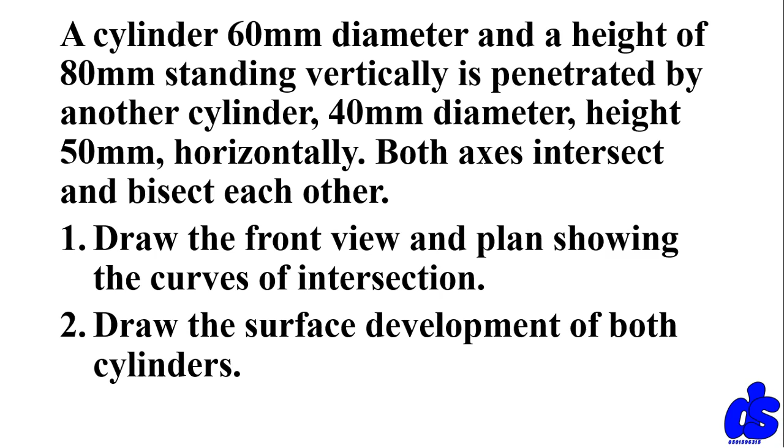We have been given a standing cylinder being penetrated by another cylinder. The standing cylinder has a diameter of 60 mm and a height of 80 mm, and the cylinder that's penetrating it has a diameter of 40 mm and a height of 50 mm. So let's quickly draw the front elevation and the plan, then we develop it when we are done.

I'm going to begin by first drawing a center line through. Bring it here. That's my center line. Then I'm going to draw the first circle. I'll start with the plan and I'll move on to the front elevation. Let me extend this.

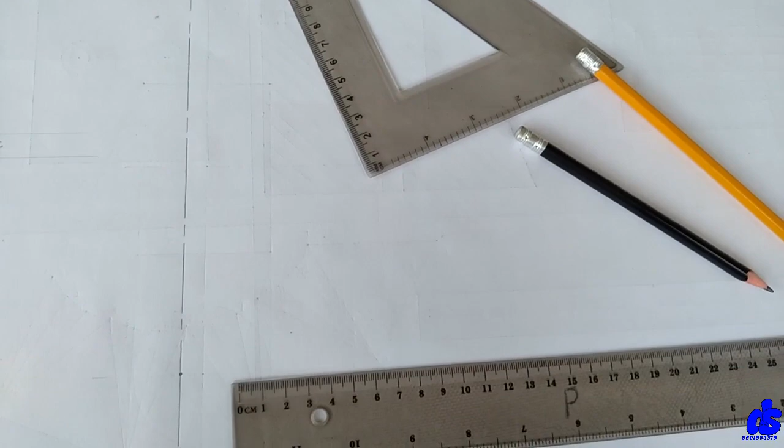So I'm going to mark here as well. I'll be drawing a circle. I'm going to measure the diameter of the first one. Sorry, the radius, 60, so I'll pick a distance of 30. Right, so that's 30. Let me stand here and draw a circle. Yeah, that's better.

Next, I'm going to project this circle to the front elevation. Project this one too. Now draw a line. Now the height of the cylinder that's been penetrated is 80 millimeters. I'm going to measure 80. That's my 80. Now draw. I'm taking this one too.

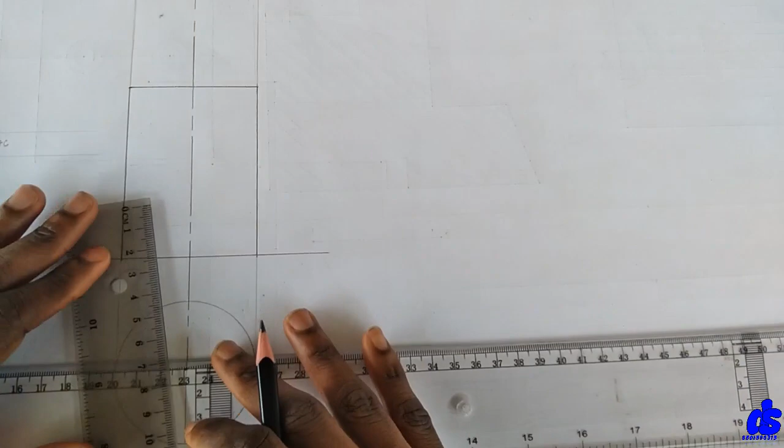Now I need to get the midpoint for me to draw the center line through. So we have 40 here. I'm going to draw a center line through. So we have this standing cylinder, this being the front elevation and this being the plan. We are going to draw the cylinder that is going to penetrate here. Now it has a diameter of 40. I'm going to measure 20 here from this center point.

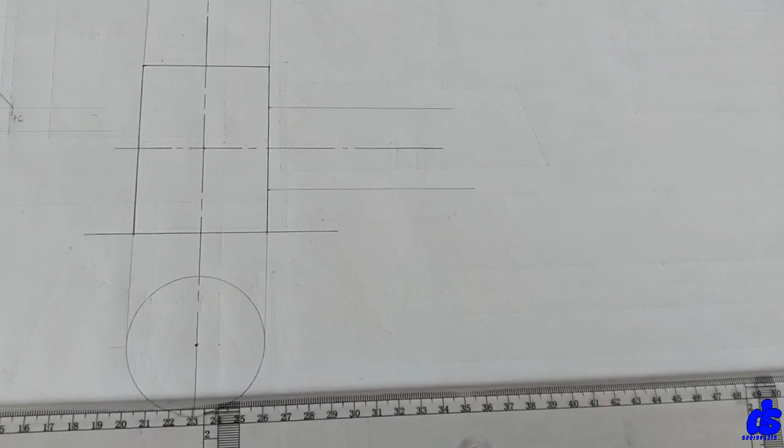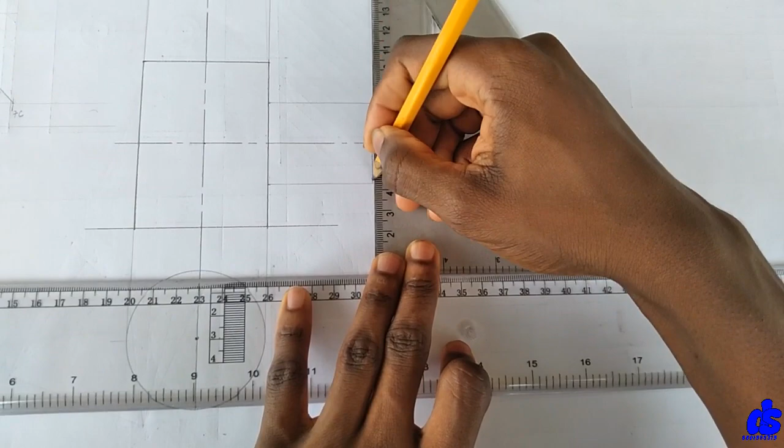Now draw a horizontal line. Another horizontal line. Now that cylinder has a height of 50. I'm going to measure out 50 and I'll mark. I'll just draw a vertical line. Now drawing the same things for the plan, I'm going to project this one down. Then we draw the center line for this circle too.

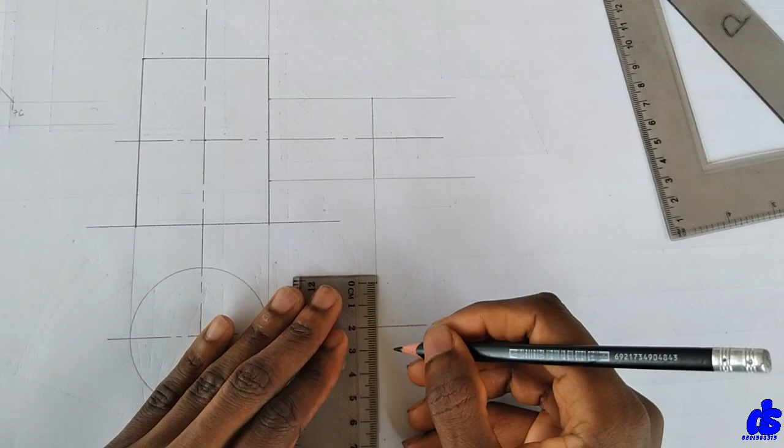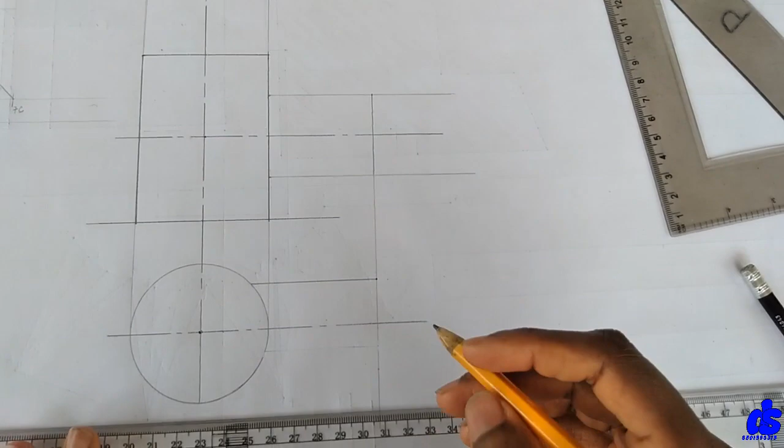Right. You measure 20 on both sides. Then draw a line to touch it. Sorry. Well, I measured 30 here, so it's supposed to be here. 20, 20. So this is 20, 20, so this one is supposed to be there. It's rather this one. And that should give us 40.

Yes, exactly 40. So now you have successfully drawn the front view and the plan of the diagram we are given. Now we need to further develop it and draw the developed surface in addition. So before we start with the development, I'm going to draw a semicircle here and another one here. And that will aid us to get the points used to plot this side, because it's definitely penetrating, so there's going to be an arc here.

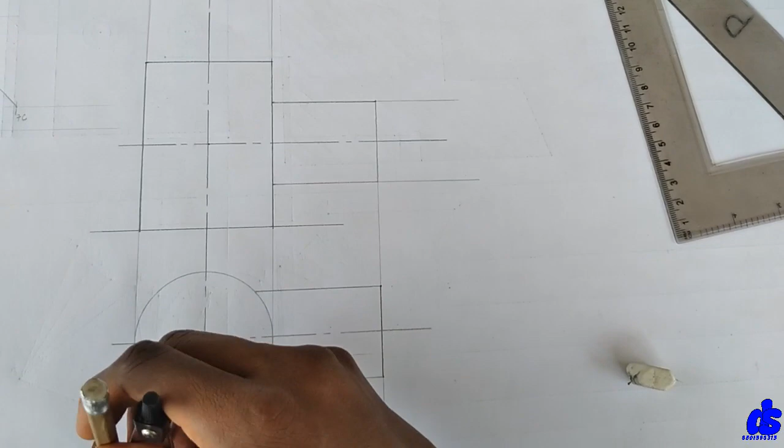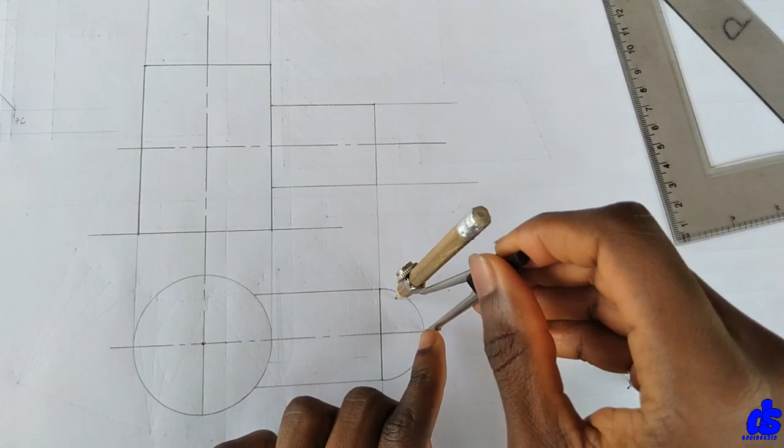I'm going to pick the radius for this one, which is 20, and stand here and draw a semicircle. Next, I'm going to divide this into 6 parts since it's a semicircle. 6 parts. So we have one here, one here, one here, then another one here. Going to join them. And then finally this one.

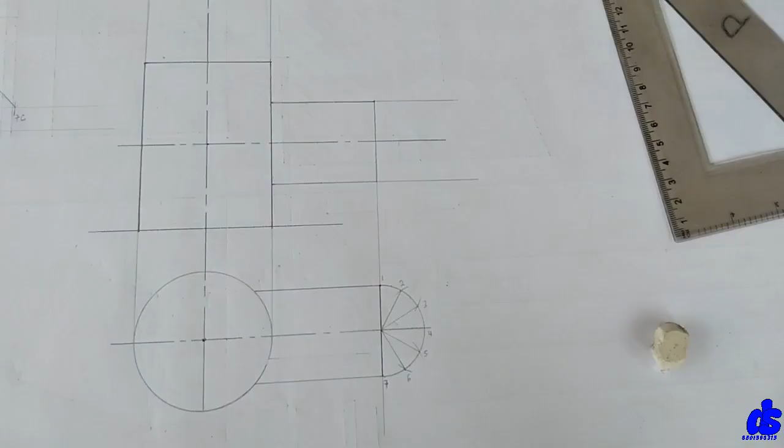Right, so let's number it. So we have 1, 2, 3, 4, 5, 6, and 7. If we had drawn a full circle, then I'd have continued 8, 9 up to 12. We are going to draw the same thing over here, but you have to be very careful of the numbering. So this is the semicircle. Right, I'm going to divide this into 6 parts. This one goes here.

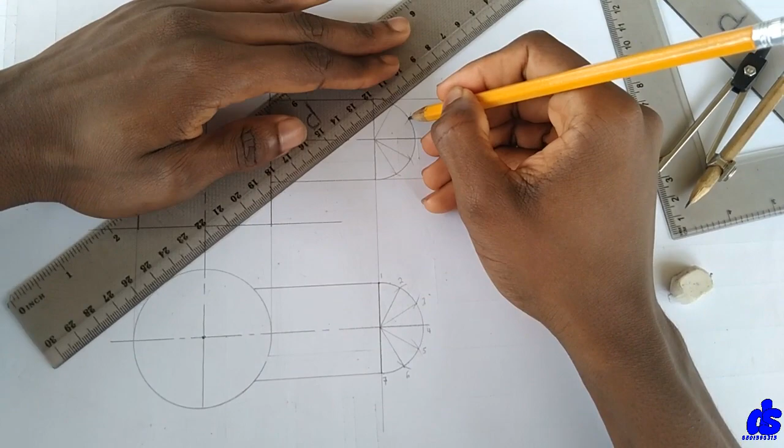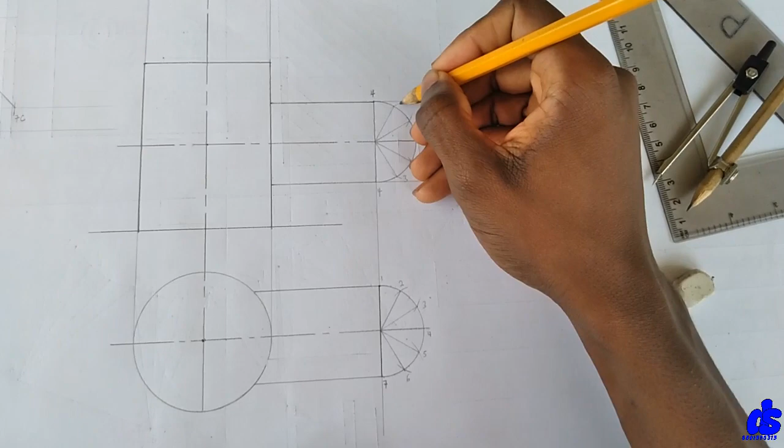Now, let's take note of the numbering. This is what you are seeing for the front view, right? And this is what you are seeing for the plan. So if you have to flip it for us to see the front view, we realize 1 and 7 will now be this way. If 1 and 7 is here, then 2 will be here, 3 will be here, and 4 will also be at this side. Then 5, then 6. Right, so this is what we have.

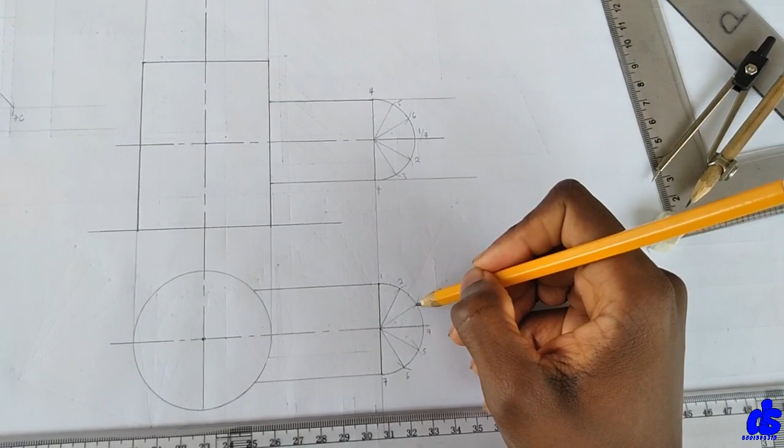Next, we are going to project these lines for them to touch this circle over here. So let's start with the projection. But before we do that, we know 2 and 6 lie on the same plane. 3 and 5 too lie on the same plane. So you can just project 2 and 3, and it will automatically be for 6 and 5 also. So I'm going to do it for 2 and 3 only. Then 3. Right. Now we are going to do the same thing for this one. So we are going to project the lines.

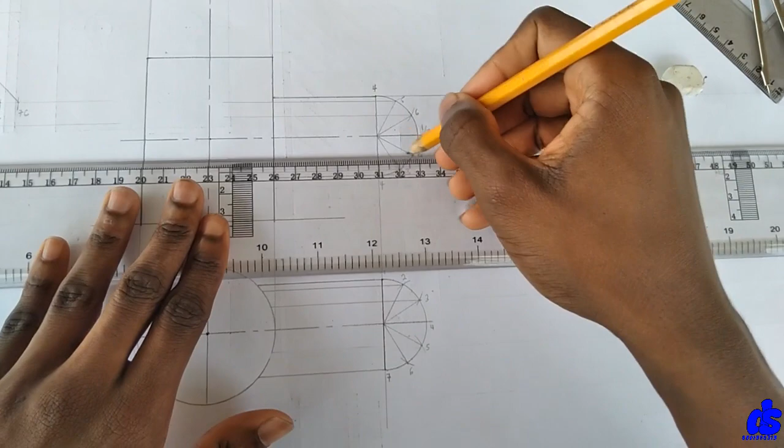I think this one is too faint. I think it's a bit clear. Next, we are going to project these lines to the top for it to meet these ones. So where this line meets with the circle, it goes up. So at this point, it's going to go up. It's going to go up at this point. At this point, it is going to go up. Then at this point too, it will go up. Then finally we have this which is this one.

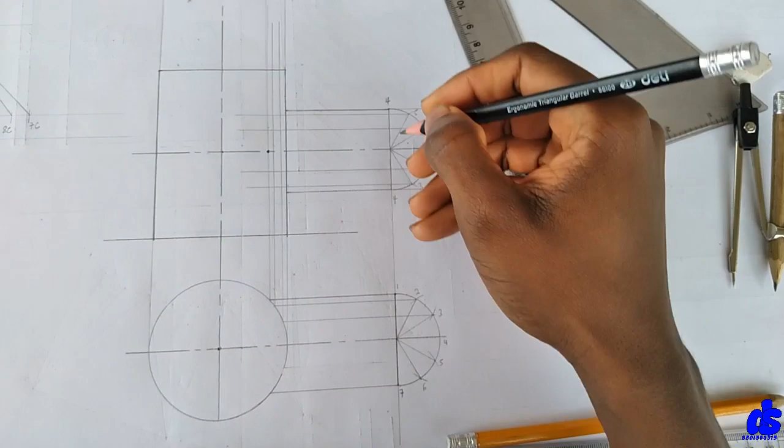Now let's mark up the points. Now let's see. 1 is going this way and it goes here. 1 coincides here. So you're going to mark this point. Let me use this pencil. You're going to mark this point. 1 intersecting with 1. Now you're moving on to 2. 2 is going this way and it's going up. And it's intersecting with 2 over here. So this 2 here. But we know 2 and 6 are on the same plane. So it's also going to intersect with 6. 6 is over here. You mark.

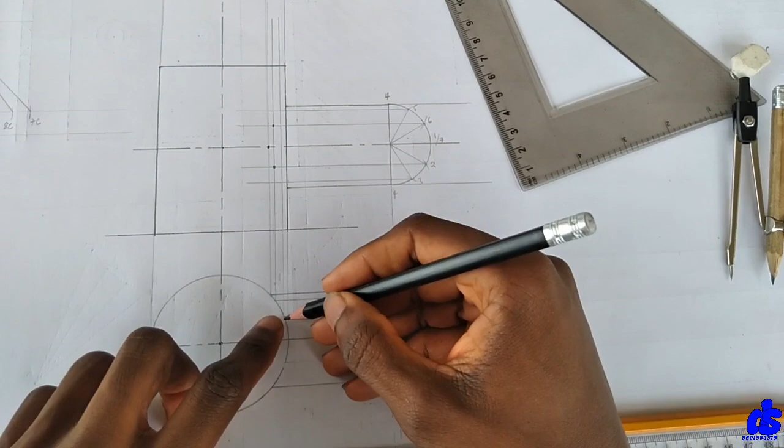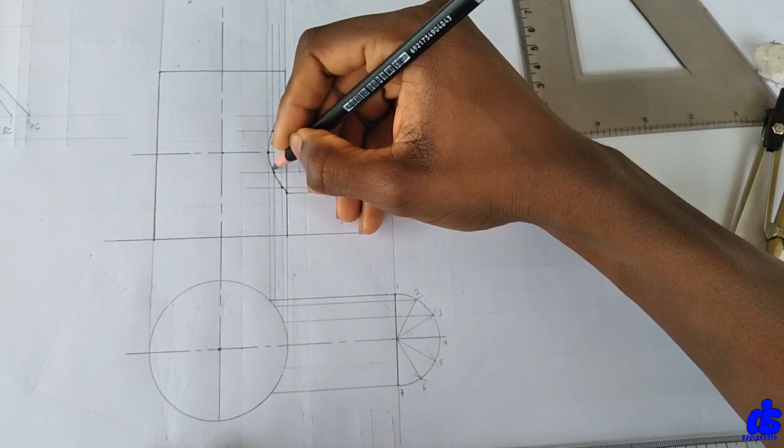Next, 3 is going this way. And 3 and 5 move together. So 3 going this way. Intersect with 3 over here. And also intersect with 5 over here. Then finally, 4 is going this way. It intersects with 4 over here and 4 over here also. Now we have the curve, so we join with the smooth freehand curve. Let me deepen it. So we have this to be the curve we are going to get on the front elevation.

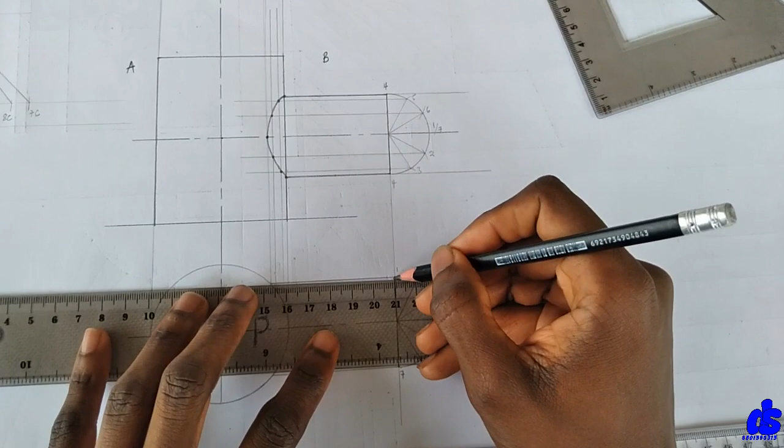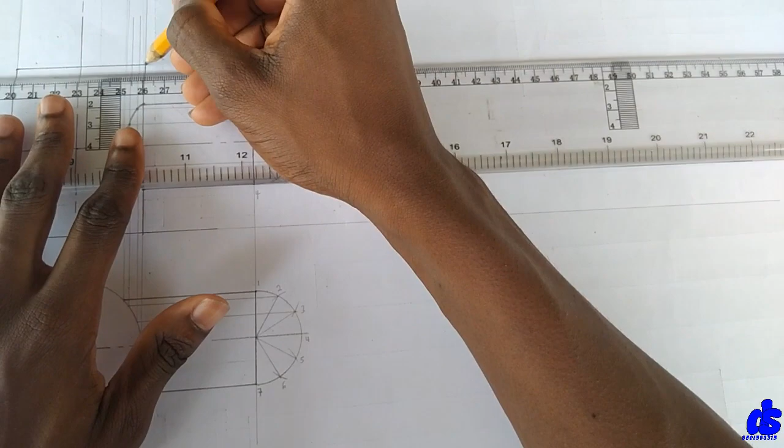Now we are done with the plan and the front elevation. What we are left to do is to develop the two parts separately. Now let's label them. Let's name this standing cylinder as part A. I'm going to name this cylinder that's intersecting as part B. Let me deepen this since it's the main. Alright, so now you're going to develop cylinder A and cylinder B. So let's start. Now with the development, let's start. I'm going to project this line. Just continue off with it. We're going to continue off with this one too. Then I'll draw a vertical line here to show where it's going to start from.

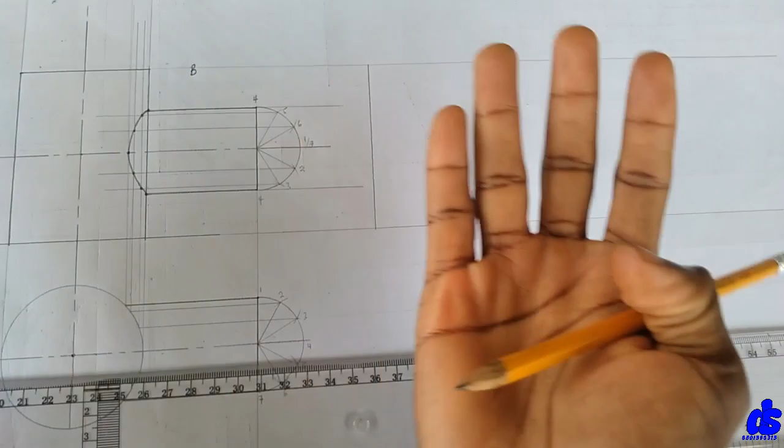Right. Now with the development, depending on where we are cutting from, if we cut from here on this plane, the circle is going to be at the corners of it because we are opening it up. So the hole will go to the far left and the far right. But if we decide to cut through this point and we are opening it up, this circle here or this hole here is going to be at the middle. So now the development is dependent on where you decide to cut. Now in a question, if we are not given the plane where you're cutting, then you can choose whichever one you deem fit to use. But if you are given a particular plane to cut along, then that's what you have to use.

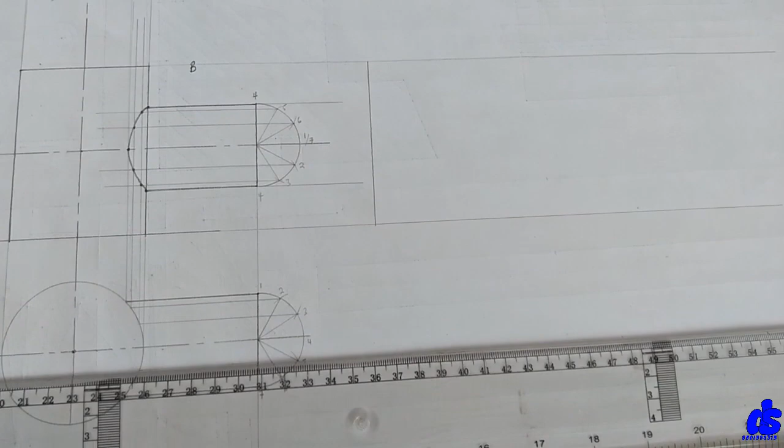Now in our case, we haven't been given any particular plane to cut along, so I'm going to assume we are cutting along this plane, meaning the circle is going to be at the center because you are opening it up. Now this length is going to be the circumference of this circle because you are opening it up. And the formula for circumference is pi d. The d over here is 60, so 60 times pi is 188.5. So I'm going to measure 188.5 over here. Yeah, so that's it. So I'll draw a vertical line through that point. So we have this to be our circumference, and this is where we are going to develop it.

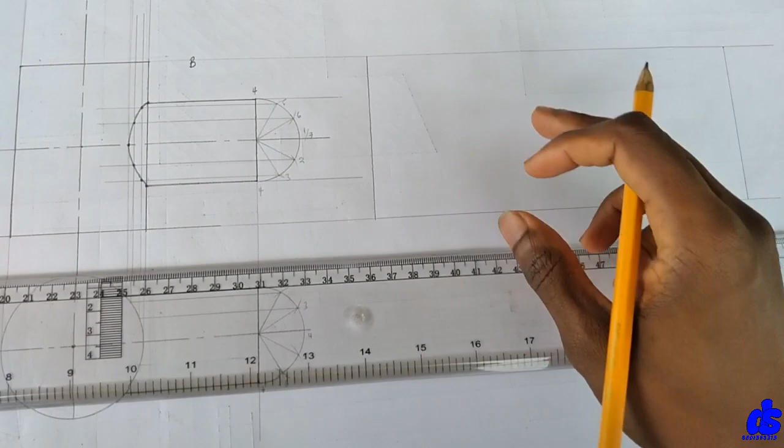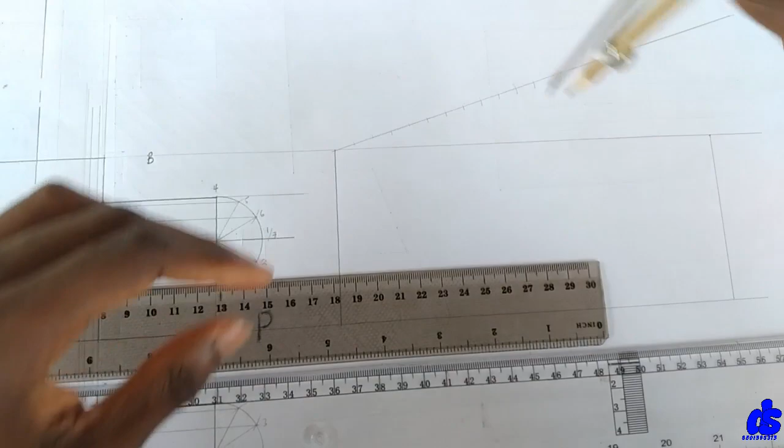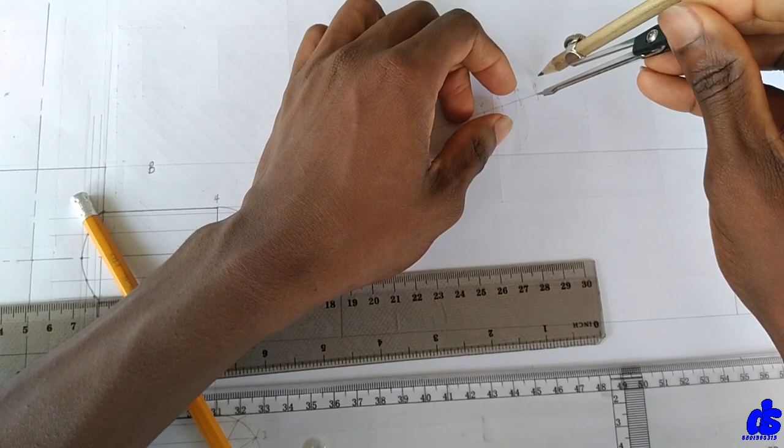Now we have to divide this into 12 parts. So I'm going to draw any acute angle at all. I'll do it up here. I think it's too faint. Let me take it. Yes, I'm going to pick my compass. I'm going to mark out 12 equal divisions. 1. Let me see. We have 1, 2, 3. Okay, last one. So I'm going to join the last point to this.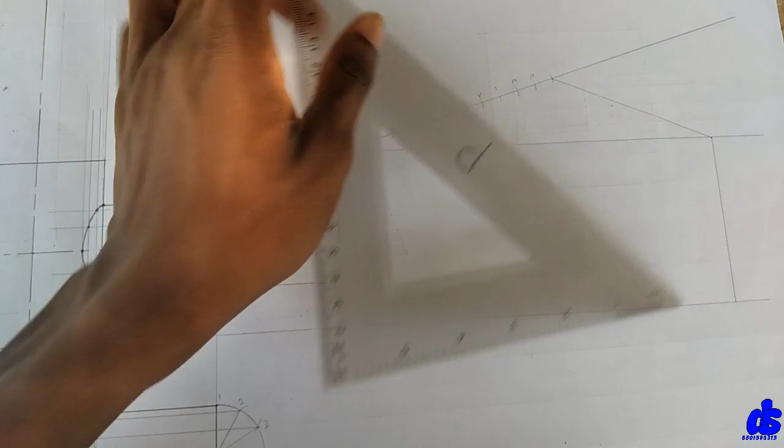Right. So the rest I'm going to do is to draw parallel lines along it. I'm going to position this here, just along the tip. It's along the tip. I'll support it with the ruler. Then I'll move to the next one. And I'll draw the next one.

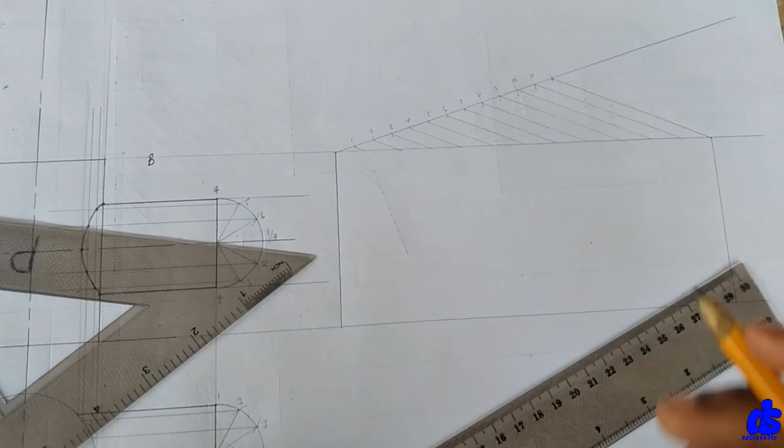So we have these points be the divisions. Alright, before we start developing it, let's take a close look at something. Now this 4 here is intersecting with this one. So meaning if you are to open it up in this direction, this 4 is going to be the center, right? So where's our center? So we're going to count 1, 2, 3, 4, 5, 6. So here will be our point 4.

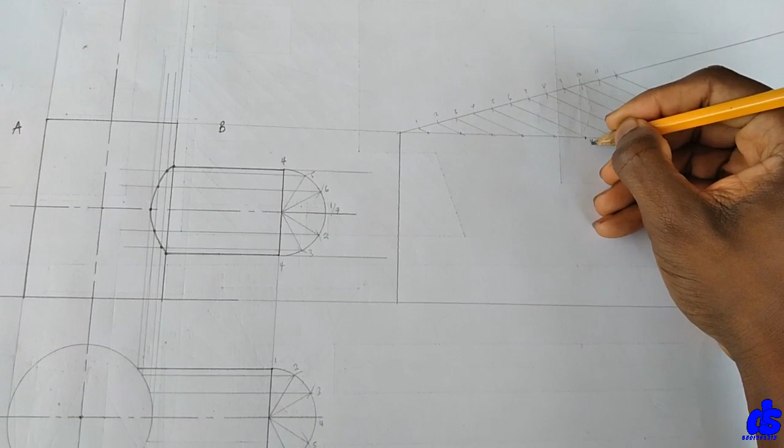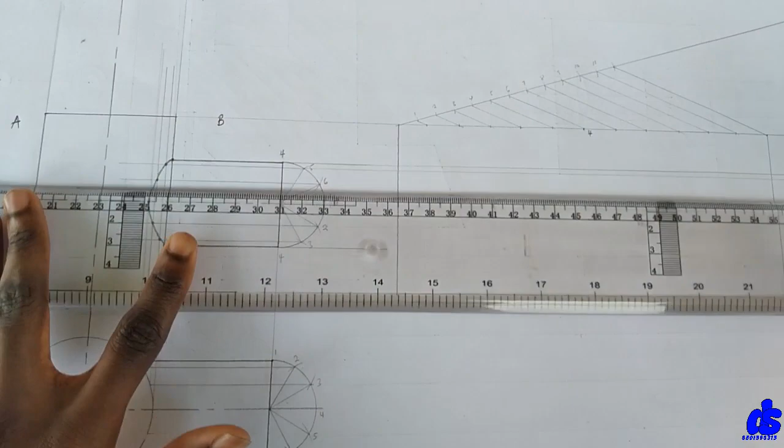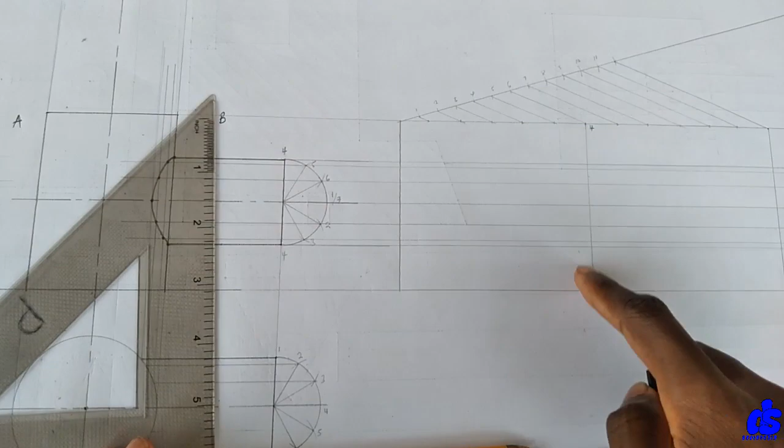Alright, so next, I'm going to draw a vertical line here at the point 4. Next, we have this 4 here to be a reference, the same thing over here. Now, we have this 4 line here. We want to get to 5. I'm going to stand at this point here and pick the distance to 5. Then you come here. Let me use this one. So 5 here, pick the distance to 4. Yeah. It's on this line, right? So then on this line, you inscribe an arc. Also inscribe an arc here.

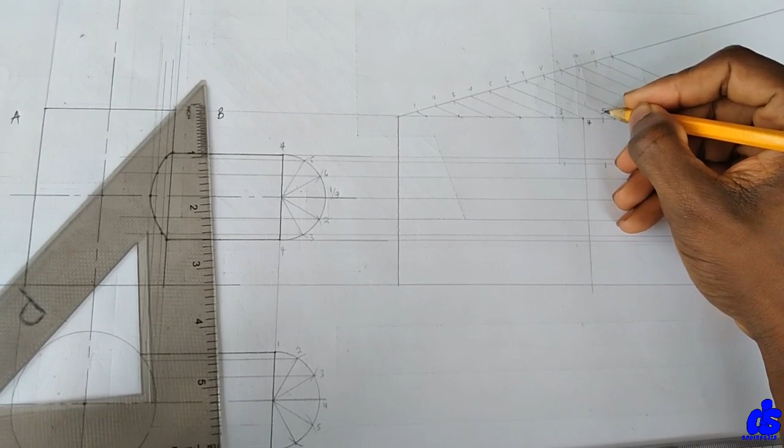Or let's do it up here, then we draw vertical lines. So let's do it up here rather. It's still the same thing. So we have this one here and this one here. So now these 2 points become our point 3 and 5 from here. We have 3 here. We have 5 here. Next, I'm going to stand here and pick 6. Stand here and pick 6. Then stand at 4 and pick 6. So this becomes our point 2 and our point 6.

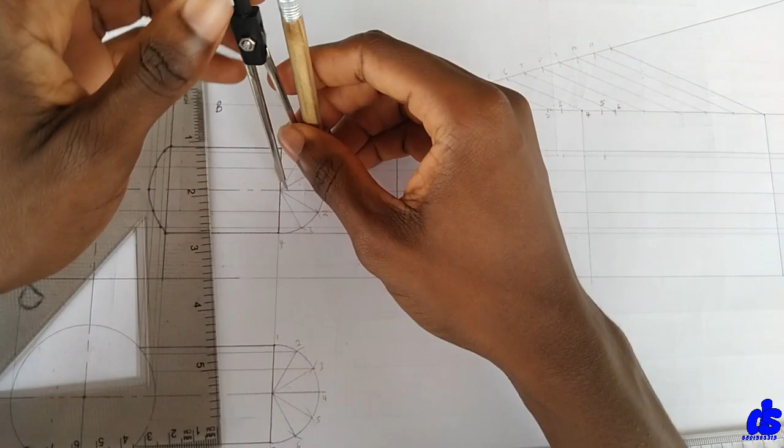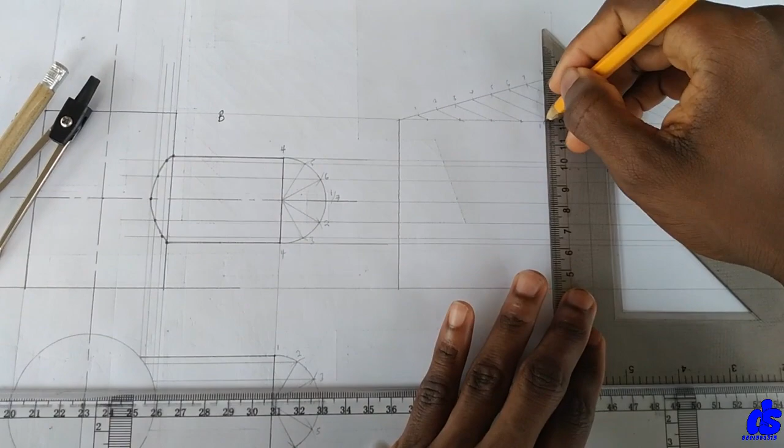Next, I'm going to stand here and pick 7 and 1. Stand here, open to 7. Stand at 4. Inscribe an arc. Inscribe an arc. So we have that to be our point 1 and point 7. Next, I'm going to draw vertical lines through. So we have this one. We have these 2. And this one. Same thing too for the other side.

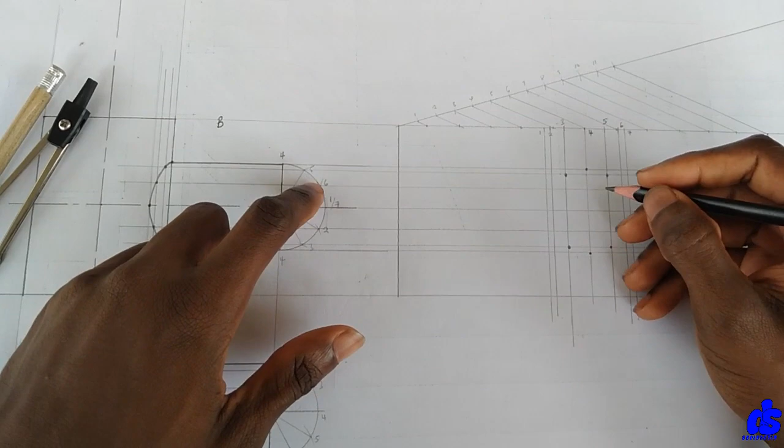Alright, so let's start marking. So now 4 is both here and here. So the corresponding is both here and here. 5 is here and 3. So 5 here and 3. Same thing here and there. Now 6 and 2. So we have 2 here. We have 6 here. Same way 2 here and 6 here. Then 1 and 7. 1 and 7 is over here. I'm going to join with a smooth curve.

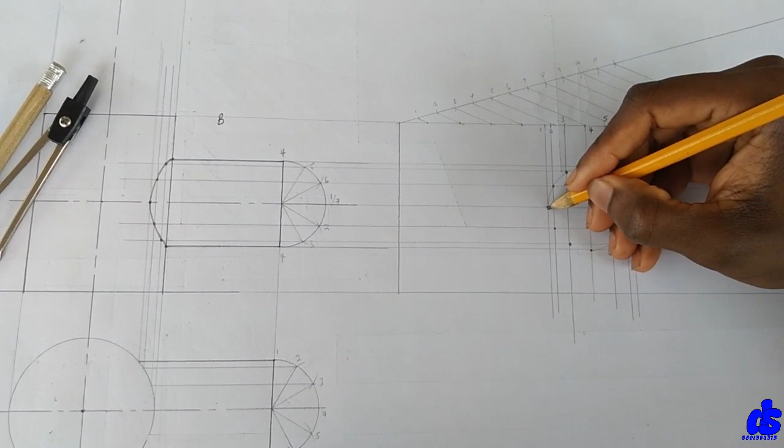So let me deepen it out. Right. So you have this to be the development. I'm going to deepen this line. This one too. Alright, so you are done with the development of A. Now let's move on to the development of B.

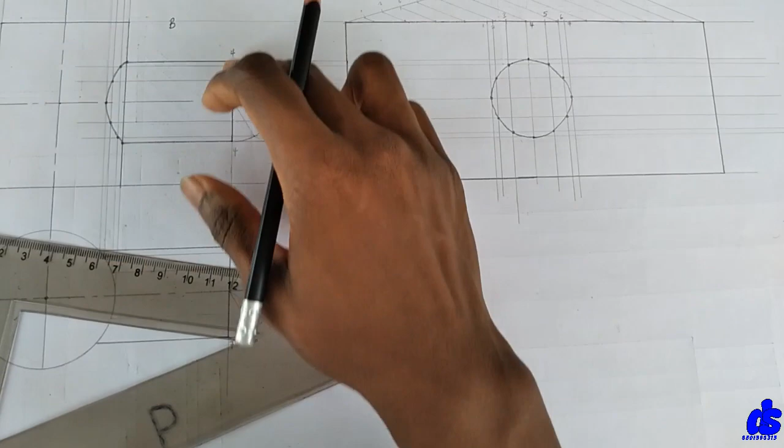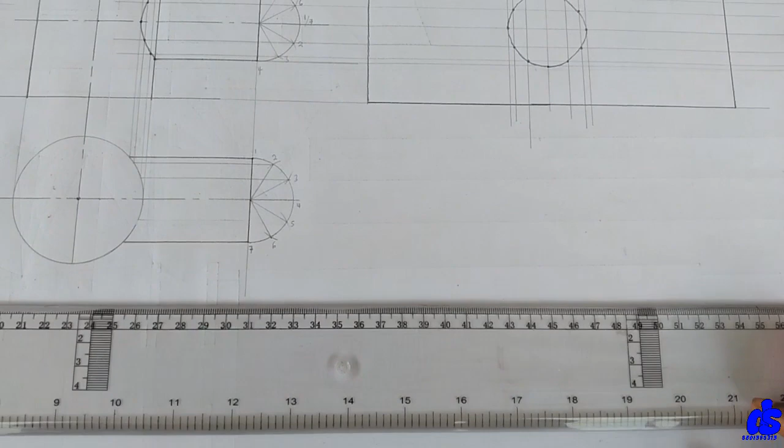Alright, so with part B, let me bring this down a bit. This is the part B. Now depending on where you are cutting, that's where you are going to start the numbering from. So let's assume you are cutting this way and you are opening it up. So 4 is going to start, then the rest of the numbers will follow. Alright, so let's do that now. I'm going to draw a line here. Then I'll draw a vertical line here too.

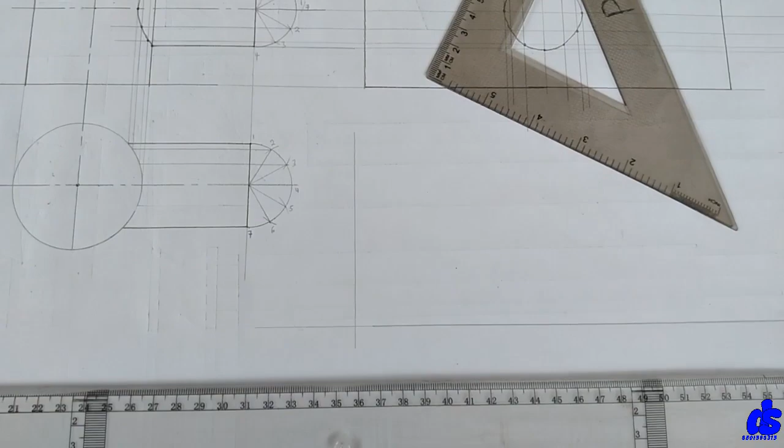Right. Next, this distance, sorry. This distance, as in the height of the cylinder that is penetrating, is 50. So you're going to measure 50 here because we are cutting it along here and we are opening it up.

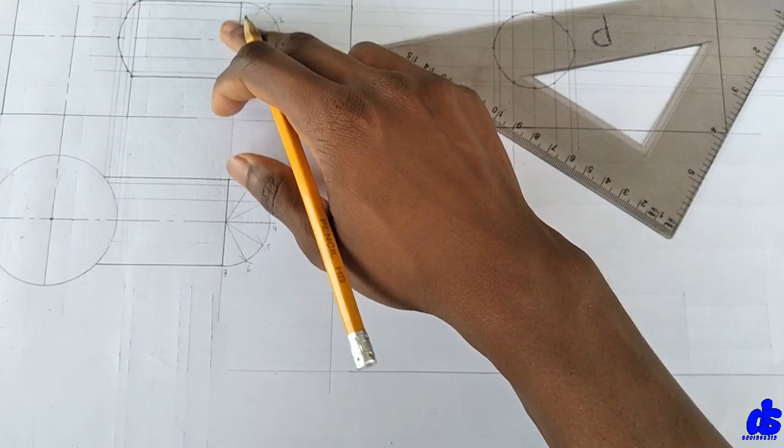So that's it. And the distance here is going to be the circumference of this cylinder. Now this cylinder has a diameter of 40. So the circumference is pi d. So 40 times pi. That's 125.7. I'm going to measure 125.7. Now draw a vertical line here also.

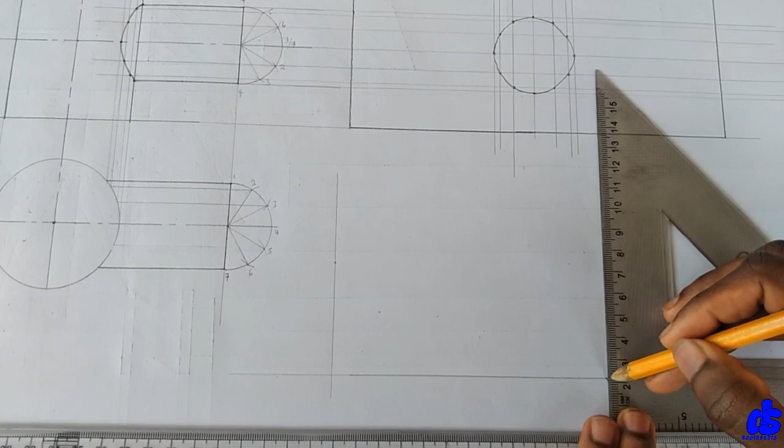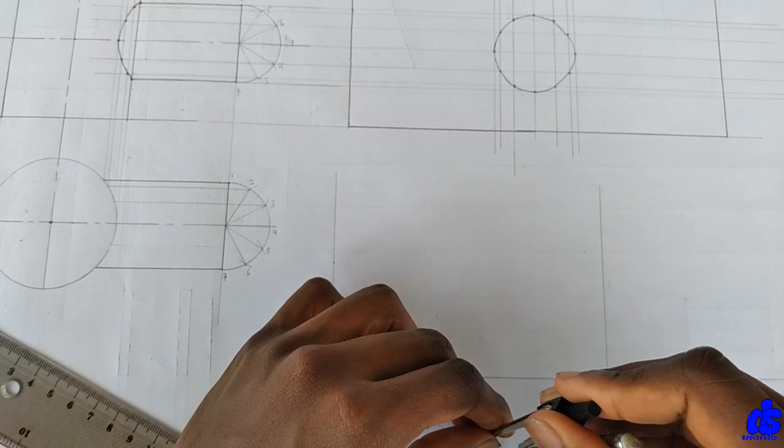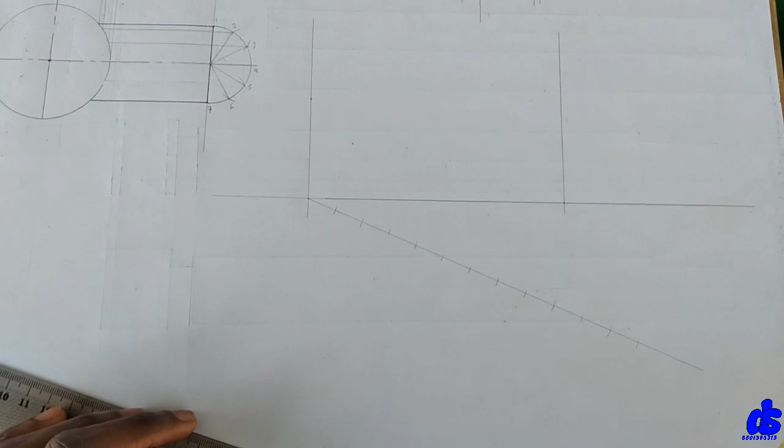Next, I'm going to divide this length into 12 parts because we made 12 divisions here. So I'll start by drawing my acute angle. I'm going to step off 12 equal distances. So 1, 2, 4, 5, 6, 7. Oh, it's going beyond the screen. Number it, you have 1, 2, up to 12. We're going to join the last point to this.

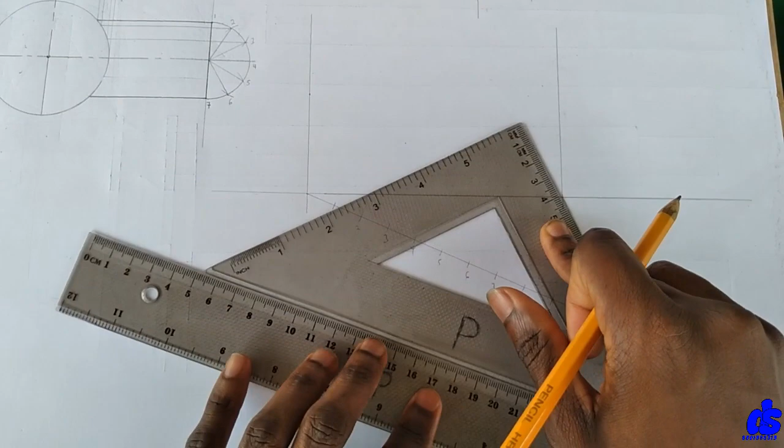Next, I'll draw parallel lines to this line. Let's see. I'm going to align this with the edge. Put this one also here. I'm going to move. Move.

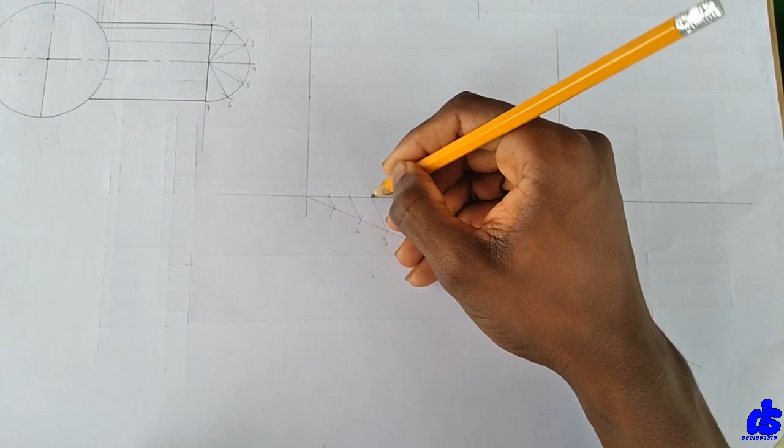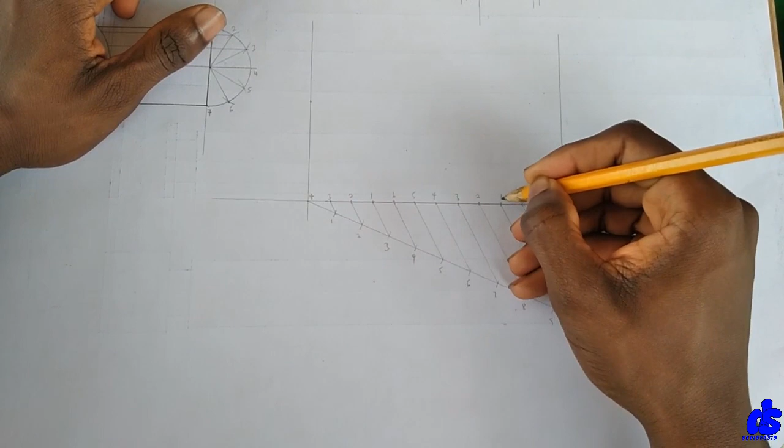Alright, so we are done with the divisions. Alright, so with the numbering, we cut at this point. We are numbering from 4, then 3, 2, 1, 2, 3, 4, 5, 6, 7, 6, 5, and back to 4.

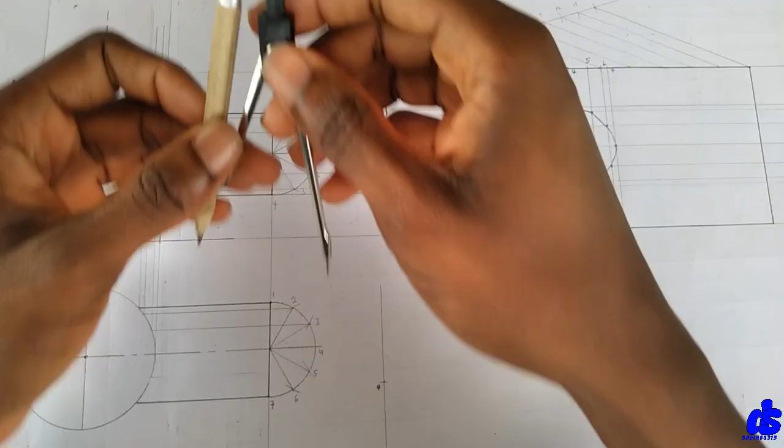Now let's go back to this diagram. Now this 4 here is this 4 here. I'm going to pick the distance here. I'm going to stand here and inscribe an arc. So that arc becomes our point 4. Next, I'm going to stand here and open to this. Get the distance. Stand here and inscribe another arc. And that arc becomes our point 5.

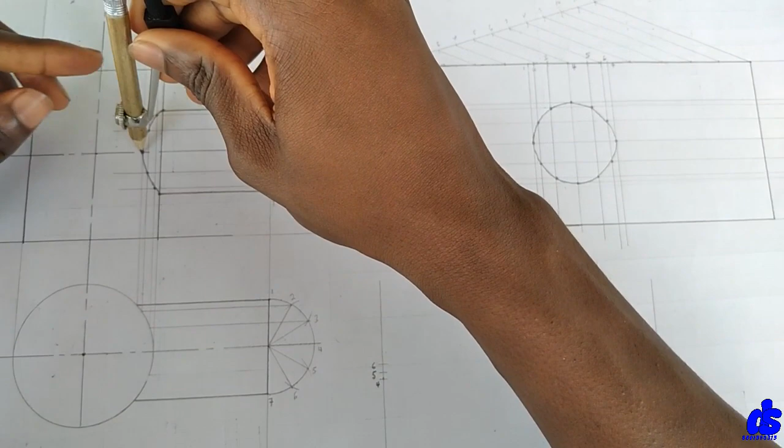Next, stand here, get this distance, bring it here, and inscribe an arc. And that arc becomes our point 6. Stand here, get this distance, stand here, bring it here. And that becomes our point 7. Now if you have to continue, you end up with 4, 5, 6, 7 again. So there's no need to do it again. So we have this.

Alright, next I'm going to draw lines through these points. So let's start. So you have this one going through this one. You have this one too going through. You have this going through. You have this going through. Next, you are going to draw vertical lines. Bring it here. At this point too.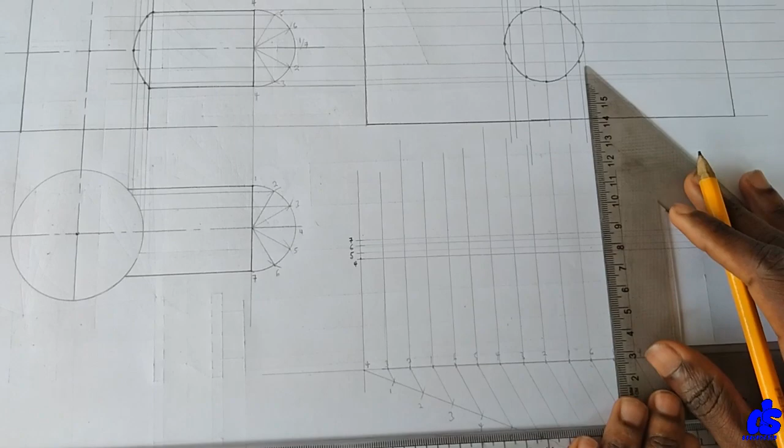You have this. So now let's begin with the plotting. So now 4 here corresponds with this. Now 3 and 5 move together. So 3 and 5 goes this way. 2 and 6, 1 and 7, 6 and 6, 5 and 5, 4 and 4.

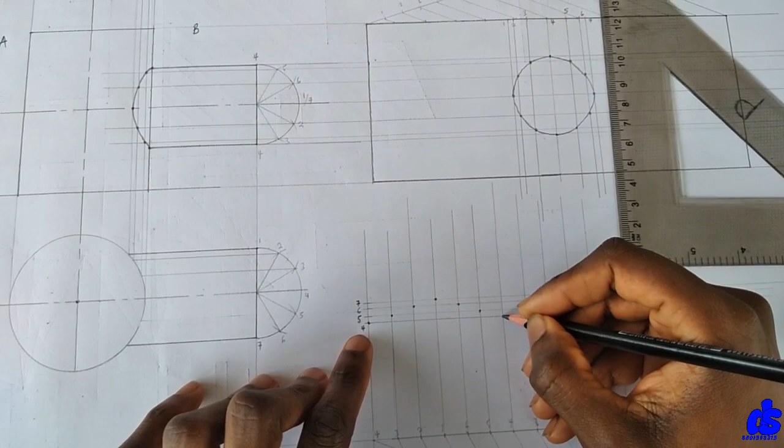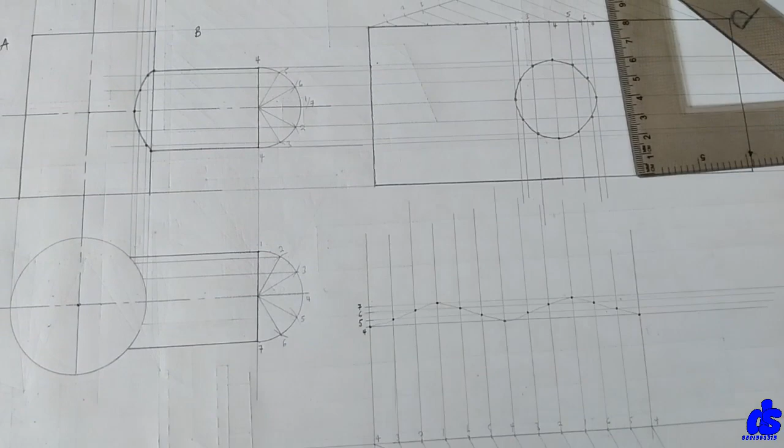Then we move on again. 3 and 5, 2 and 6, 1 and 7, 6 and 6, 5 and 5, and finally 4 and 4. I'm going to join the points with a smooth freehand curve. Deepen it.

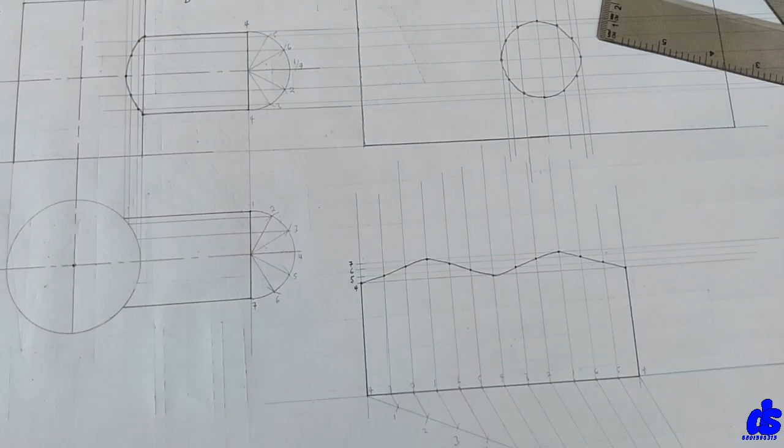Then I'll take in this one too. Take this one too. I'll take in this one too. Alright, so that's it here. Finally, I'm going to draw the last thing and we are done. So I'll draw another vertical line here.

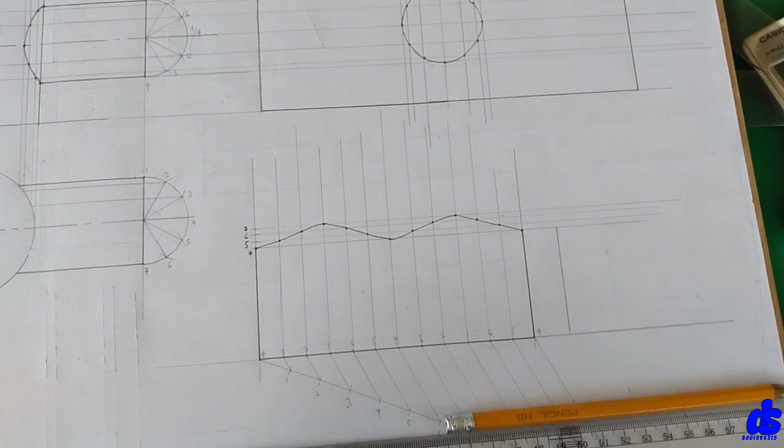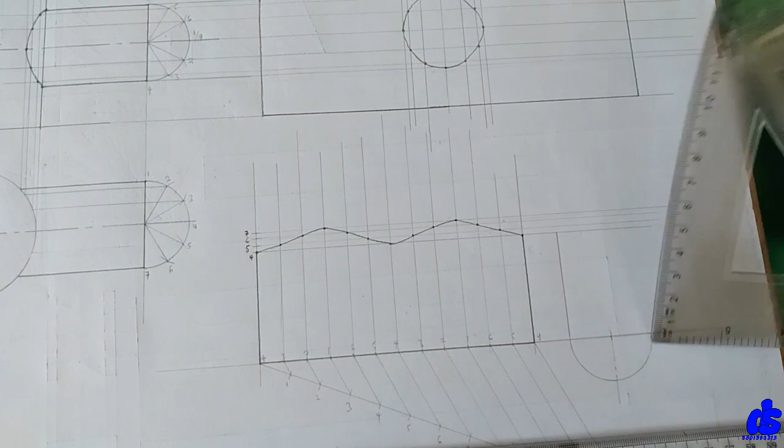Then I'm going to pick this radius, that's 20. That's 20. I'm going to stand here and inscribe an arc. And I'll stand here and draw a semicircle. At this point. I'm going to divide this one into 6 parts. So before I do that, let me draw a center line through. Alright, so we have a center line there.

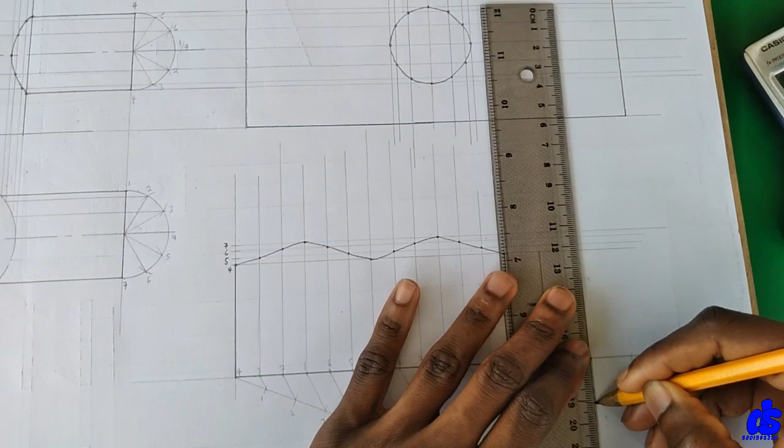We stand here, mark here, and mark there, stand here, mark here, stand here, and mark at this point too. Alright, so these points are going to the center. Also going here. Right. And I'll draw another line here.

Now I'm going to number it the same way I numbered this. So 1, 7 is here. 6 is here. 5 is here. 4 is here. 3 is here. 2 is here. And back to 1. Now I'm going to project these lines to the top to intersect with these lines I've already drawn.

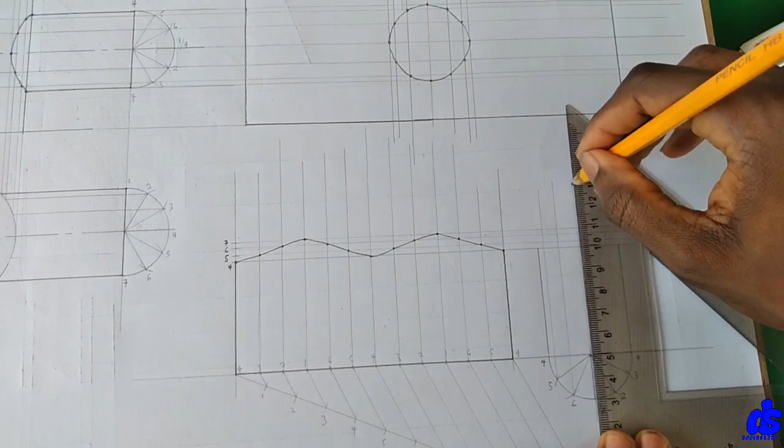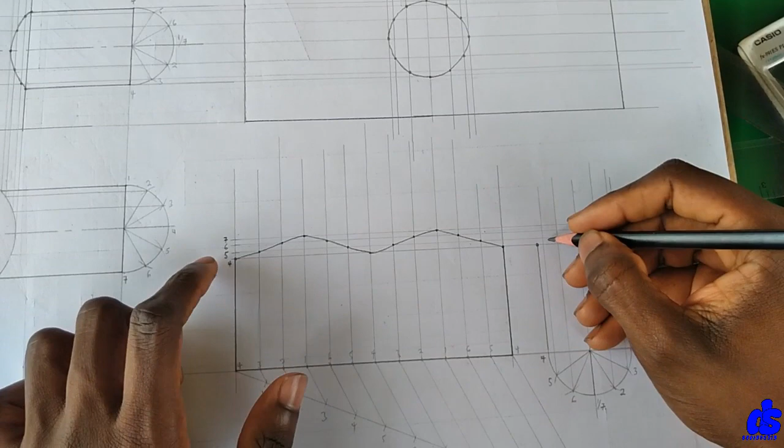So let's start. So I'm going to project 5, 6, 7, 8, 9, and 10. That one. Alright, next we are going to mark the points using the same points we have here. So now 4 here coming to meet 4 over here, that will be this point. 5 here coming to meet 5, this point. 6 coming to meet 6, this point also. 1 and 7 coming to meet 7, this point.

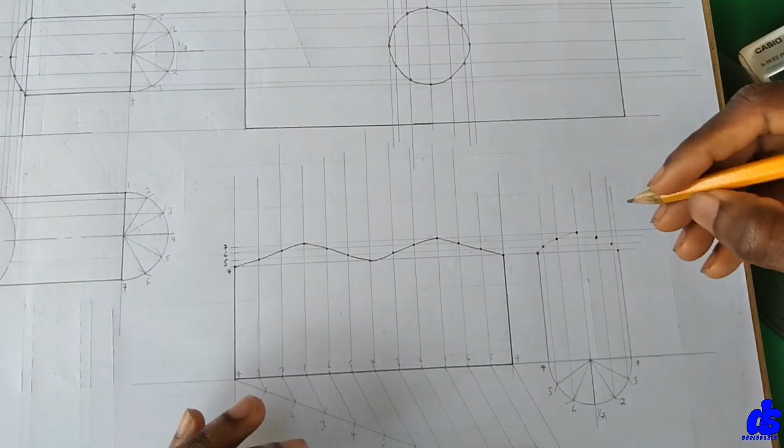2 is coming, but we know 2 and 6 from here are on the same plane. 2 and 6, so 2 will meet 6 over here. 3 will meet 5, then finally 4 will meet 4. I'm going to join with a smooth freehand curve. I'm going to take it in. Now taking this one, taking this one too, and taking this.

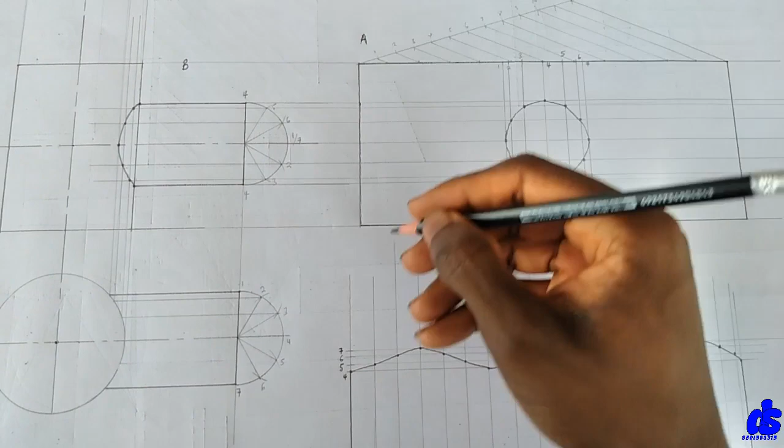Alright, so this is the developed surfaces. So this is our part A as we initially numbered, and this is our part B. Alright, so that's how to develop a standing cylinder with another cylinder penetrating it.